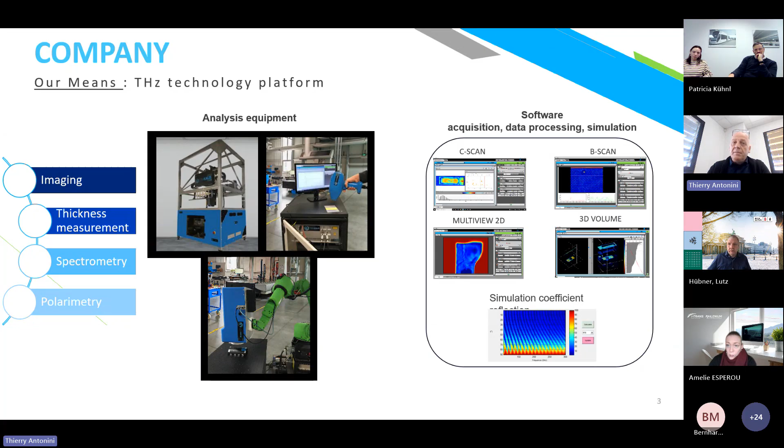Here you can see on the slide such a bench or technical means that we can provide for testing material in our premises, but we can also do some tests directly on customer sites. Obviously, more than hardware, we complete them with software for data acquisition, processing, and even some simulation, mainly today for imaging, 2D, 3D, and also thickness measurement. Today we are more concentrated on lab applications or production line applications.

Here you can see some developments. Mainly, we completed our hardware with some mechanical scans, such as a robot or some translation stage, for instance, automatic inspection on conveyor. And the last machine we created was dedicated to cylindrical parts. It is a rotary scanner for 360 inspection of cylindrical parts.

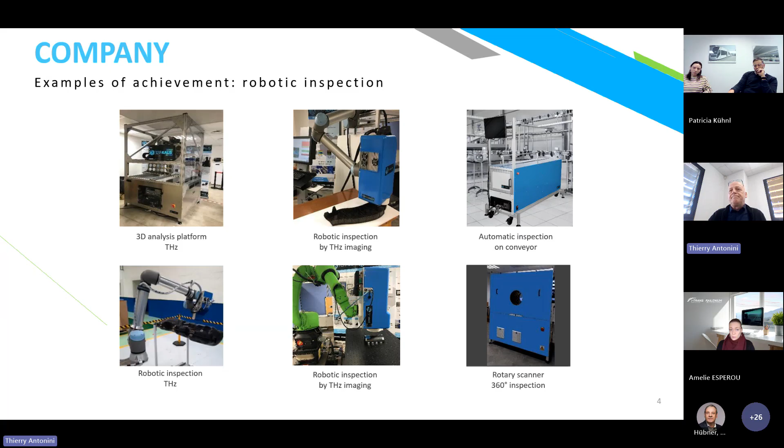Sorry. As I said, we have 3 ranges of offer: laboratory equipment, production equipment, and we are starting now to develop some devices for maintenance activity on operating sites, because as you will see, the technology which allows us to inspect the inner defects of a material could be used also for maintenance activity.

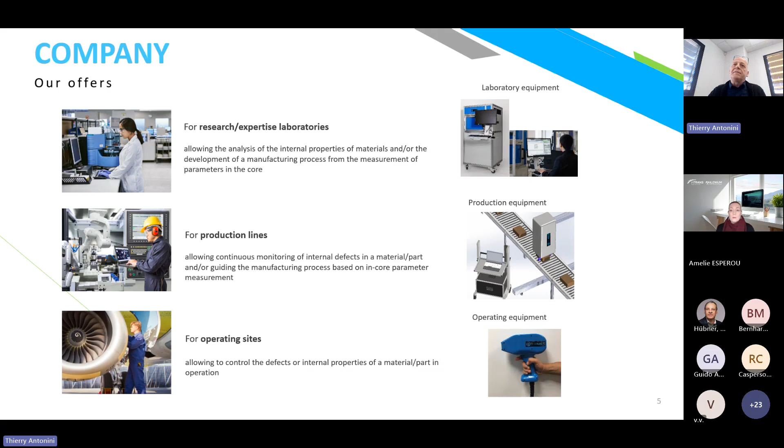About technology, first I need to locate the waves that we use. They belong to the electromagnetic spectrum and are located precisely between microwaves and infrared. It was the last domain which was not used for NDT, non-destructive testing applications, mainly because of physical reasons. In fact, it started 20 years ago with the first laboratory devices, and only recently for industrial applications. It started 5 years ago with the appearance of the first systems for production lines. The problem was to get more mature and more robust systems for industrial environments.

And this technology is interesting for three main reasons. It's non-ionizing waves in comparison to X-ray, so no danger for the operator. It can penetrate non-conductive materials, mainly polymer, elastomer, ceramic, and composites based on such materials. And it can also provide some interesting signatures for understanding how materials transform, for instance, for crystallization, polymerization processes, and also aging processes, which could be used for maintenance activity.

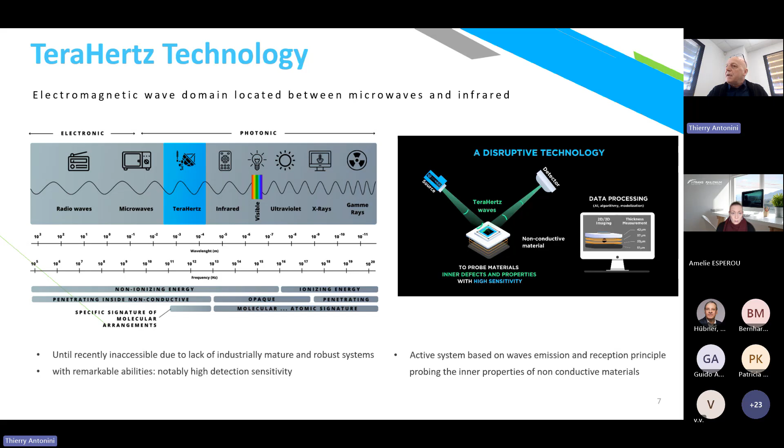The main principle of this technology is based on active systems. That means you have a source which emits waves. The wave penetrates the material and then goes to a detector. Based on this, we can probe materials, especially inner defects and inner properties, in a non-destructive and non-contact way. And after processing the data, we can give interesting information to the customer for detecting defects, locating defects, giving the size of defects, and also giving some measurement of a layer.

The main principle of this wave in terms of wave-matter interaction is that all materials are classified in this graph. Some materials are quite absorbent, so of course we won't be able to penetrate them. For instance, metal is quite absorbent, and at the same time metal is also quite reflective. That is why we cannot penetrate metal as a conductive material. On the contrary, polymer, ceramic, composite, foam, we can penetrate easily.

And one more thing is important to know about such a wave: water and polar liquids are quite absorbent. So if there is too much water inside the material, we won't be able to penetrate. On the contrary, a small quantity of water inside material could be easily detected by our waves.

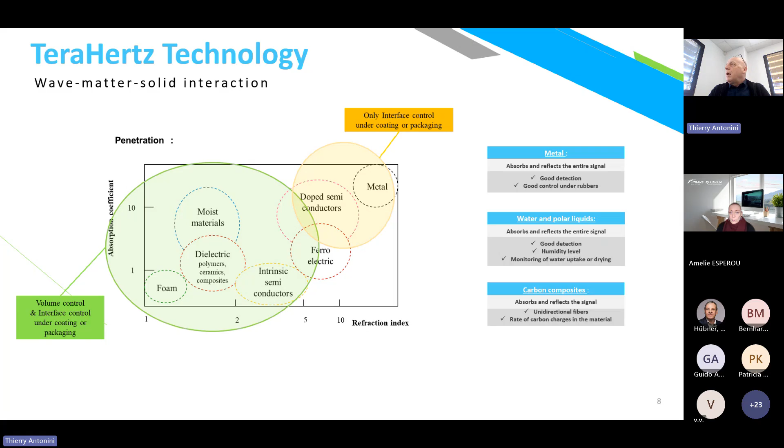Carbon composites also, you can imagine, are quite conductive. So the only application we can address for such a material is when the carbon composite is unidirectional tape, we can penetrate, but as soon as the directions of the carbon are mixed, it's not possible for our wave to penetrate. It's not the case, obviously, for glass fiber, which is a non-conductive material. So glass fiber and aramid fiber could be easily penetrated by our waves.

Here is a summary of the performance and the advantages of the technology. Contactless, penetrating, non-destructive, not harmful, portable, fast, easy to integrate. And for imaging, we can address defects less than 1 millimeter and penetrate a few centimeters of such non-conductive materials at high speed. It could be 2D or 3D imaging.

And for thickness measurement, we can measure from 5 microns, so very small layers, to larger layers up to 10 centimeters, with quite good accuracy, plus or minus 2 microns for very small thickness, and 10% of the measurement for higher thickness. Speed, more than 100 points of measurement per second, quite adapted to industrial production speed. And a very important point is the possibility to discriminate layers in a stack of multi-material coating, for instance.

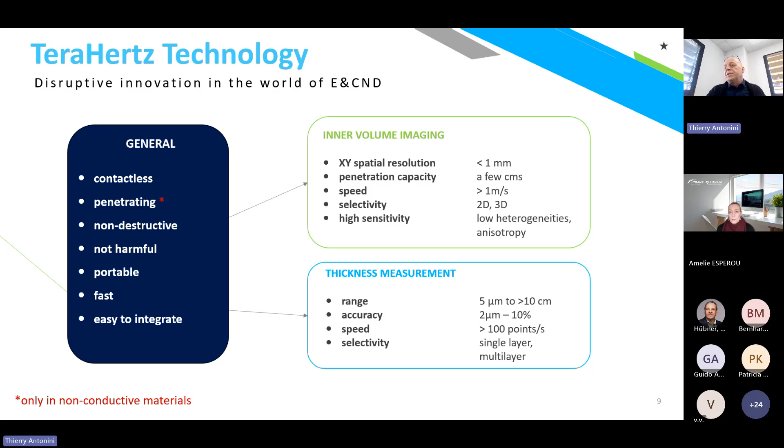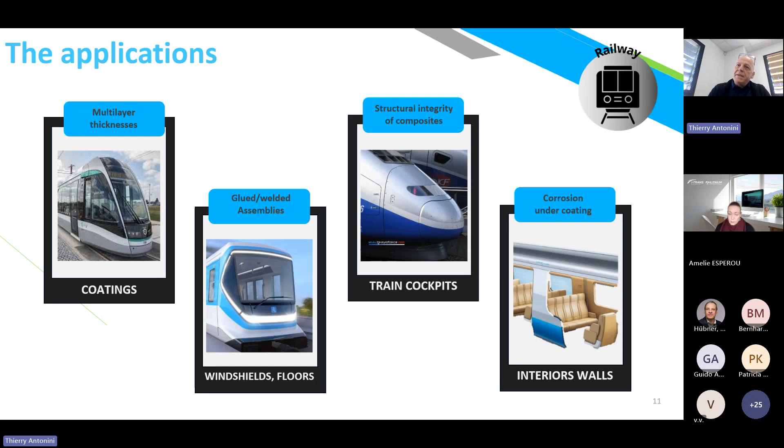And last, what we are asked today by some customers is to be able to detect corrosion under coating or under interior walls that you can have inside trains, in order to avoid removing the panel for detecting corrosion. It could save a lot of time, and it gives you the information that the metal which is behind the walls is already corroded. I go now in detail into the 4 applications.

So inspection of coating based on time of flight measurement. Each interface could give an echo back to our system. And if we can measure the time between 2 echoes, you can have access to the thickness of the layer. The main advantage is that it's quite fast, contactless again and couplant free.

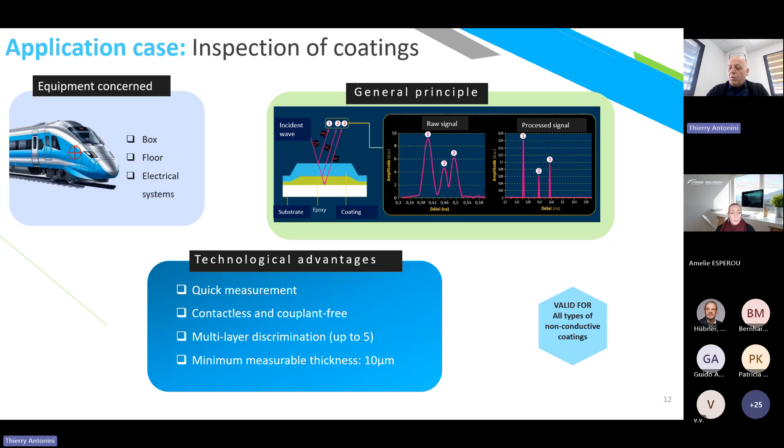Multi-layer discrimination, which is not the case of many NDT techniques, and minimum measurable down to 10 microns, and it can work whatever the substrate. It could be a metal or a composite substrate. This is the main principle, how it will be displayed on our software. We can adapt our measurement head on some robotic system,

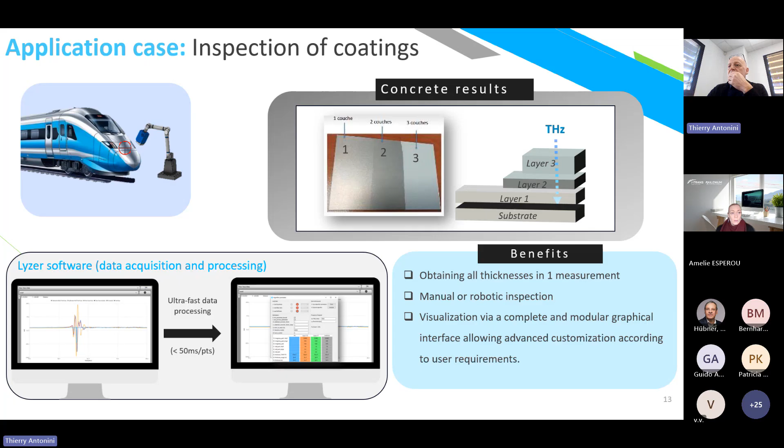and maybe just for your visualization, here you have the case of an application. It was for the automotive sector, but it could be used. So as you see, the system first is doing some calibration by itself. And after a few quick steps of calibration, the system can do by itself a series of measurement points, as you will see now.

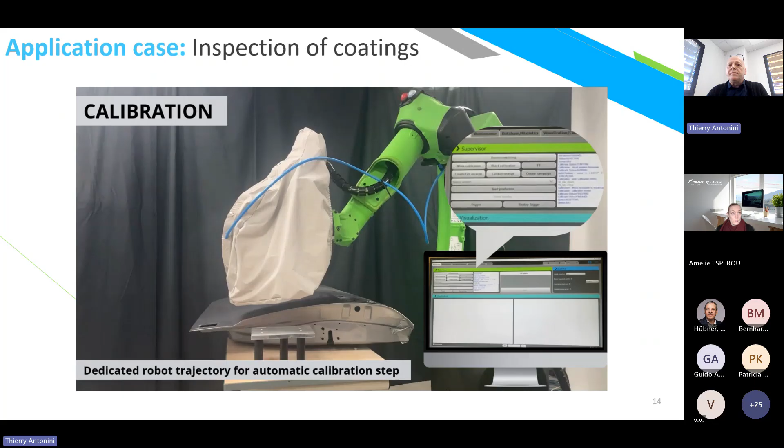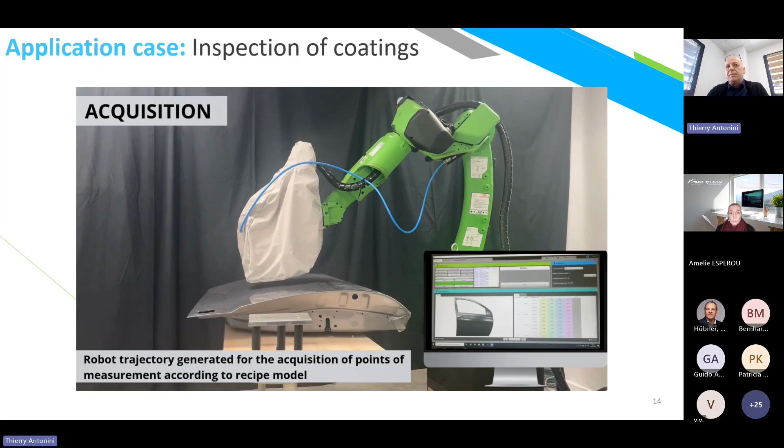So the system will start to move and to follow the surface of the part in order to do measurements on the fly, I mean in real time, based on trajectories that could be defined and series of points which have to be located before, in order to ease the measurements which are afterwards consolidated.

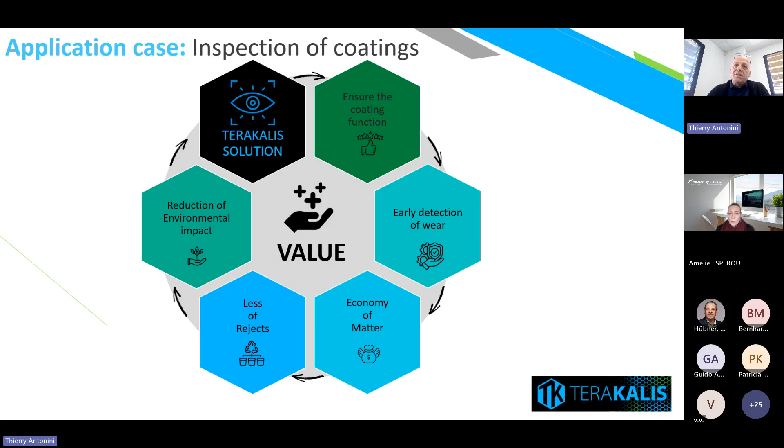A lot of value behind such an application. It could be, of course, quality improvement, but also productivity improvement by reducing materials or by early detection, or by limiting the rejected parts due to bad quality, by anticipating defects and locating defects, gaining more knowledge on the process itself, and reducing also some environmental impact.

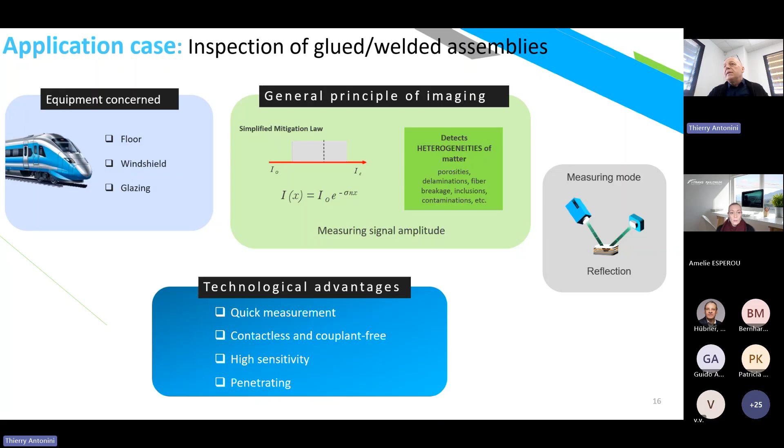Second is about assembly, and windshield is the main target, or even floors could be interesting to control. So it's based on reflection mode. It's not thickness measurement, but imaging based on an imaging sensor. It can be done as a quick measurement, contactless and couplant free again, and penetrating all materials.

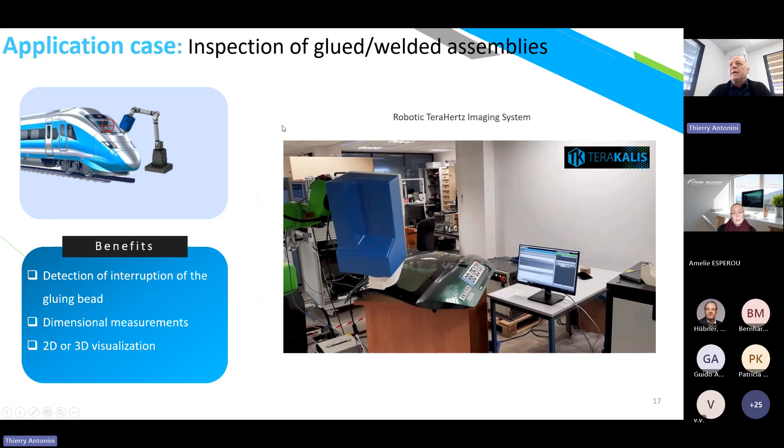Here you have another example, mainly for the automotive market. You can see the speed. The control is to detect the glue bead between glass and plastic tailgate, and we can easily detect the size of the glue bead defect inside through this technique, again non-destructive and contactless. Here you can see the result at the lower part of the slide,

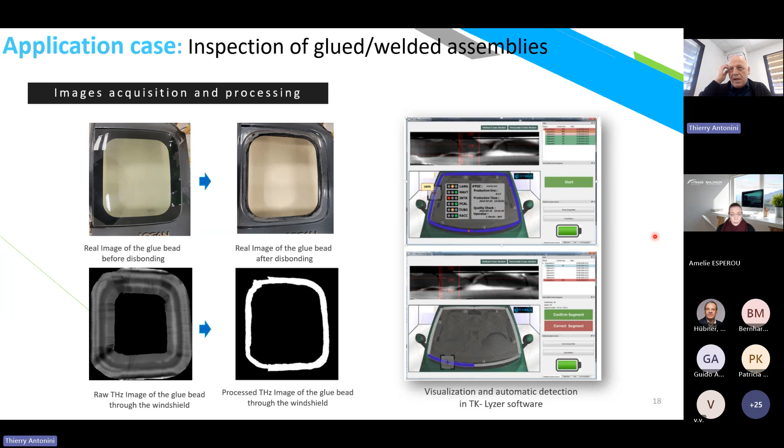how the bead is represented. Sorry, I don't have the laser. The bead is represented in white here, and after extraction of the information, you have the size of the bead. If there is some interruption, you can detect it, and the final display on the software lets an operator decide and validate non-conformity or not.

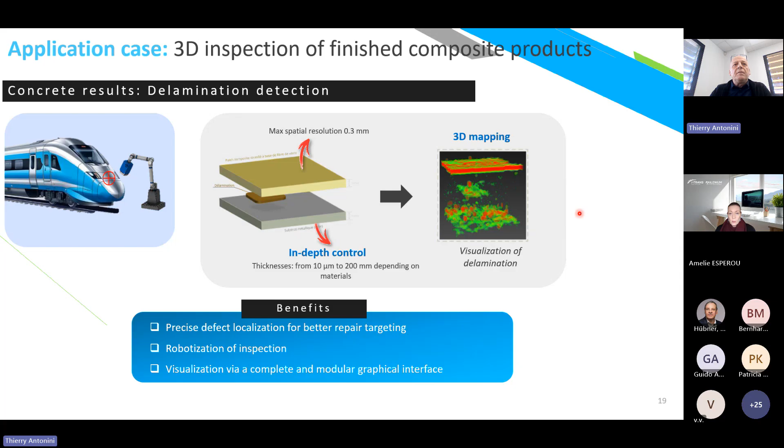Concerning a cockpit, for instance, you see a THz image where we can detect, for instance, in this composite stack, a delamination that could be detected on a 3D mapping, could be located, and the size of the defect could also be provided by the system with our penetrating waves.

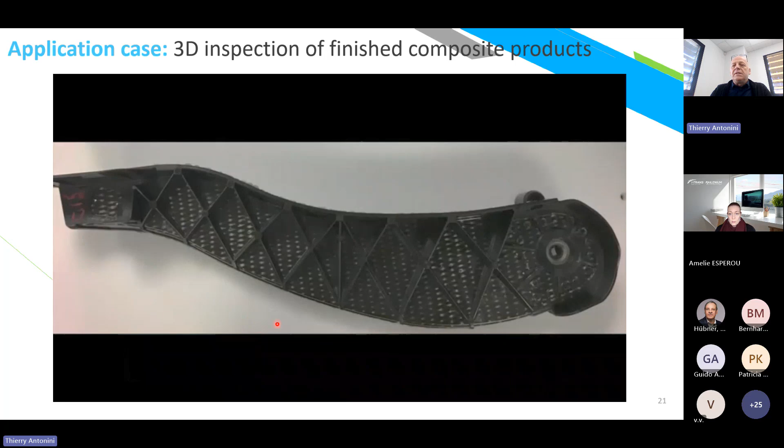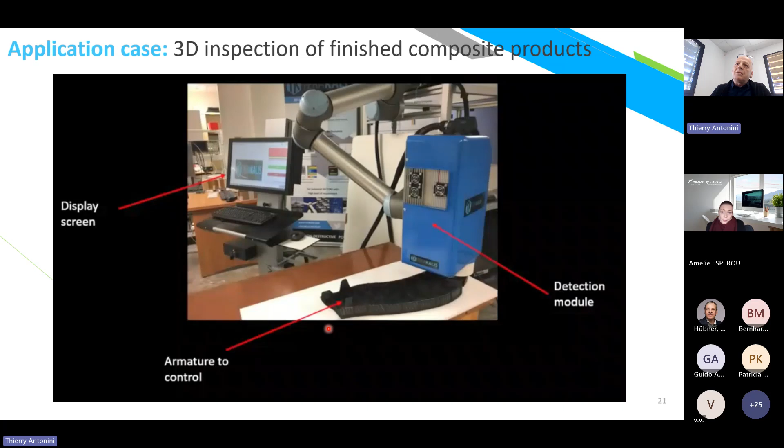Sorry. Well, okay, I will go through due to the time, but just for you to have an idea, this is a composite part that we can inspect. You see how it will be assembled, how the system could work, and the scan will start little by little, and in real time you can see here some potential defects inside such materials.

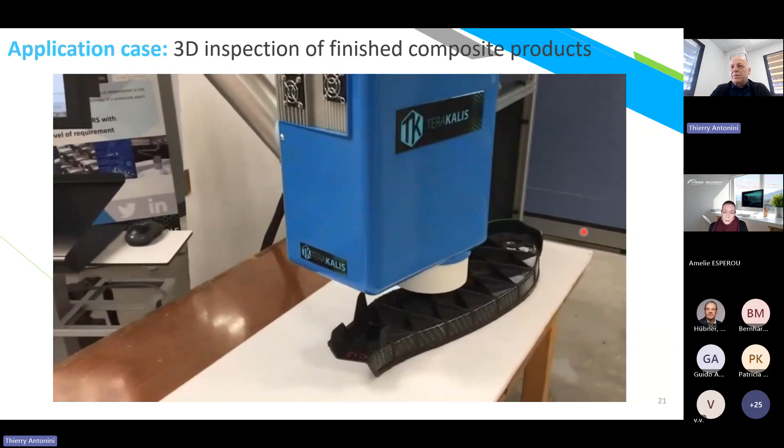And last but not least, corrosion under coating or under materials. Again, the wave can penetrate the wall, plastic polymer walls, and can see behind the wall.

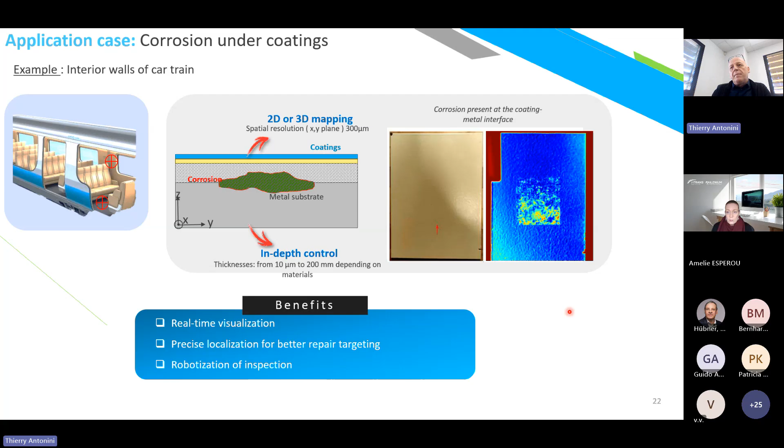So as a conclusion, this new NDT technology based on THz waves presents unique capability for advanced control of non-conductive materials, obviously for thickness measurements, especially for multi-layer coatings, or to image defects inside the materials, different types of defects: delamination, air gaps, bonding issues, and also to detect corrosion under coating.

And sometimes, step by step, our customers use the system in their process in order to correct some parameters of their process in real time. That's my conclusion.

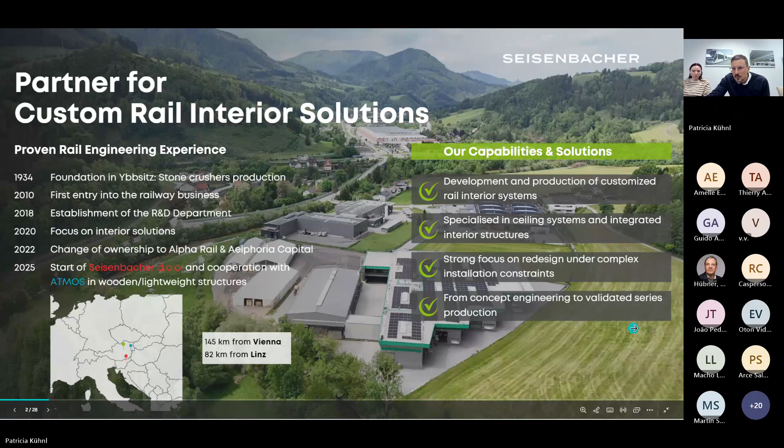I already explained a little why the railway industry relies on Seisenbacher. We have a clear focus on safety. That means we try to think as a passenger, not only as a supplier. We try to visualize what the passenger would feel, and what safety requirements are necessary for passengers to feel comfortable and safe on the train. We also try to think about solutions that make the journey more an experience than just traveling from point A to point B.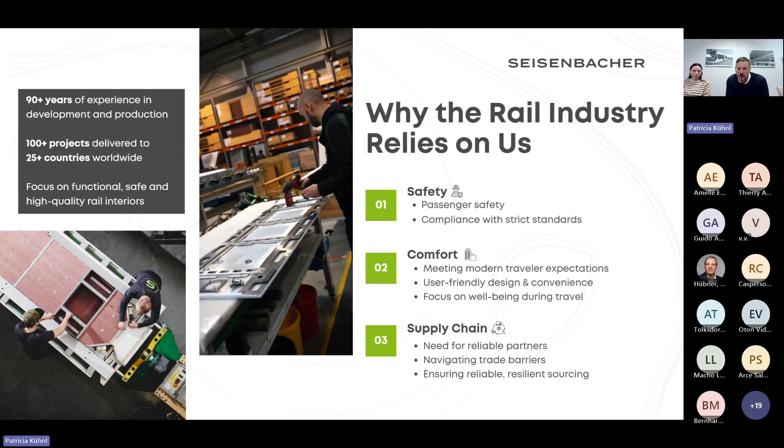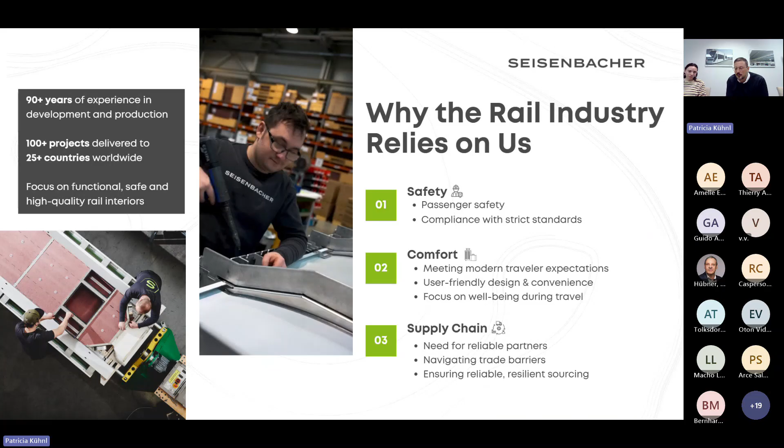As a third big part of our work, we see supply chain management. In past years we have built up quite a significant base of reliable partners. We always look for solutions to navigate trade barriers, like shipping to the US, while ensuring reliable and resilient sourcing. The big challenge is to combine all these aspects into a finished product, into rail interiors. Our answer is innovative products combined with our deep understanding of manufacturing. This is the strength we put on the table.

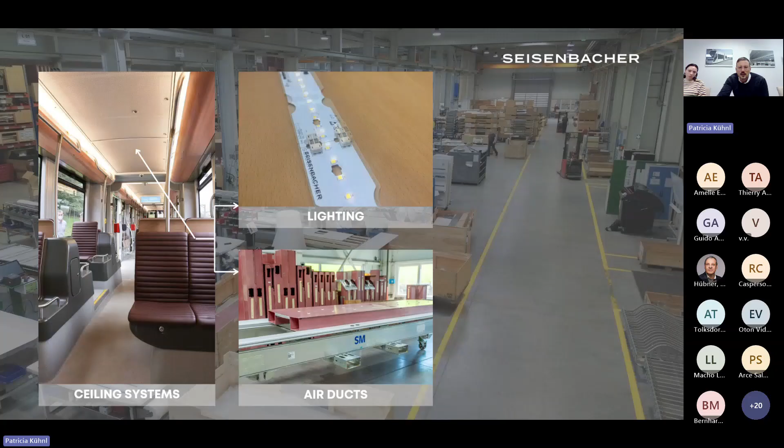So before we jump into engineering details, let me show you our key rail interior solutions. As mentioned before, the majority of our turnover is coming from the ceiling panels or ceiling interiors, where we integrate lighting, but also air ducts to give one complete ceiling system to the customer. And besides ceilings, a strong product is also luggage racks and luggage shelves, but also partition walls and claddings. The main material we are using for our products is metal, aluminum.

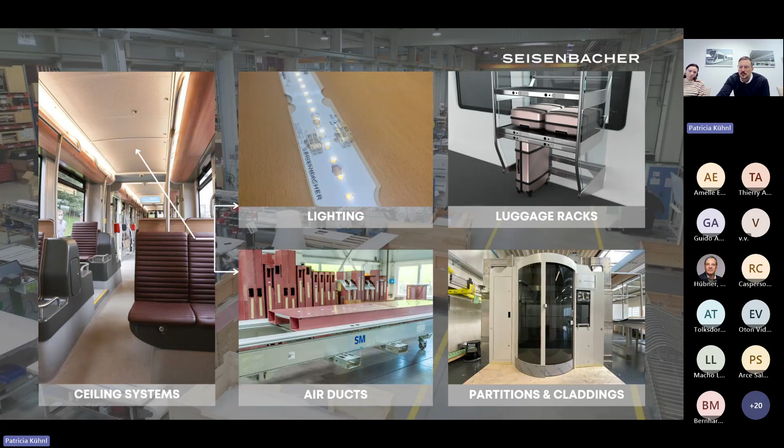Our technical competences or core competences reach from mechanical engineering to electrical engineering, and all the necessary validation steps that are needed, combined with a testing laboratory where we can check the simulations and confirm our design is working for the considered solution.

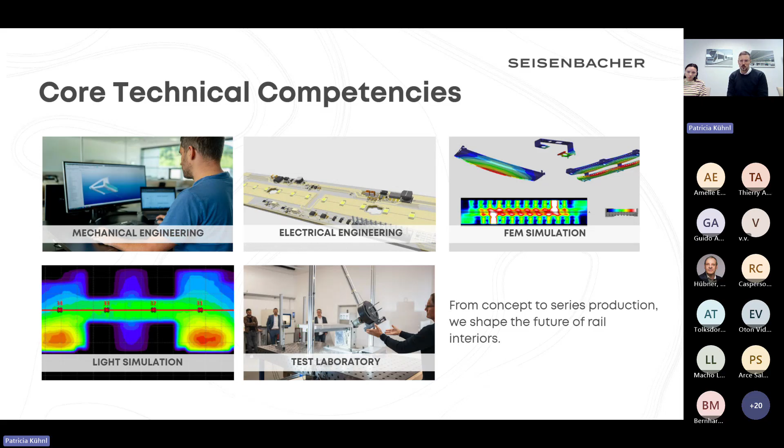As mentioned, I want to show you one very challenging development product where we think that we have a good example of combining aesthetics with safety functions. There is a safety standard in the US asking the table not to heavily injure a person when impacting through a crash scenario in such a table system. Here you can see the product.

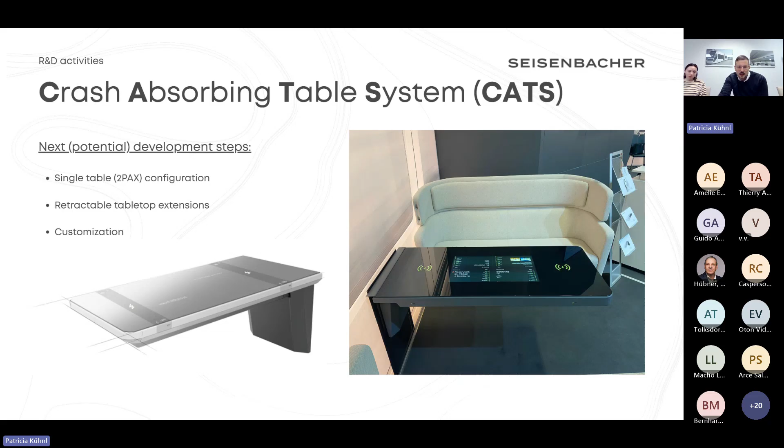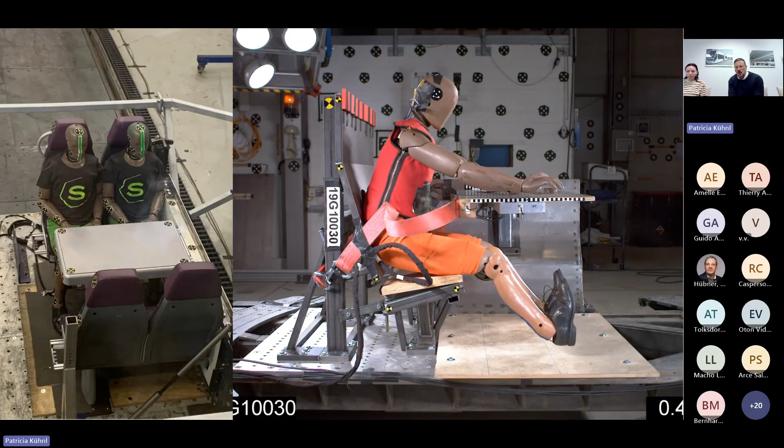What was new for Seisenbacher was the intensive testing. So not only the engineering and finding a potential solution to realize this requirement coming from this standard was interesting, but also the validation, where we took over 50 days in a crash testing laboratory. And we learned a lot about using different dummies, what are the sensors, how are they located in such dummies. And doing that brought us also on the screen of the center that is responsible for writing this standard, and a big part of the updated revision of this standard was also compiled together with Seisenbacher.

So jumping into the engineering, you may ask, why do standard rail solutions often not work? Yeah, there are many aspects. Mainly, there are limitations coming from materials and the way these materials can be produced or machined or transferred into an actual product. We have a heavy impact coming from visual aspects. That means almost every operator is using industrial designers, design houses who have very, very nice and good ideas. And the challenge is to really realize and bring to life these ideas.

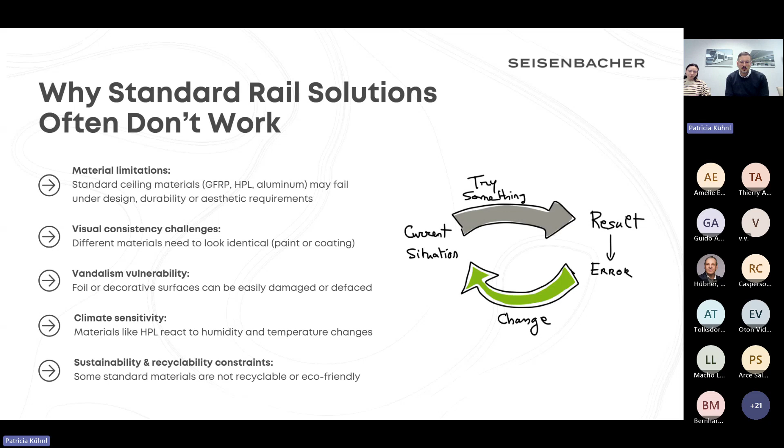And then, of course, we also have the passenger aspect in terms of vandalism. That means that the parts need to be very durable. Besides vandalism, everybody knows the life cycle of a rail system can take up to 30 years. Most of the time, interior components are exchanged mid-life, but not for the purpose of exchanging damaged ceilings or damaged parts, but to make the train or the railway car look more modern again. And then we have, of course, aspects on climate topics, and now more and more we are facing sustainability and recyclability constraints.

Some examples, we have here a project called VDV. It's a tram train produced by Stadler for several different cities all over Austria and Germany. And the goal was to have this seamless appearance across the interior, using suitable materials. In the initial design, we were confronted with using GRP parts. When combining sheet metal with GRP, you always have discussions about how the final product will look. How is the powder coating of the aluminium looking in comparison to a wet painted GRP part? And usually this can be handled through an expensive quality control aspect, comparing to the paint samples.

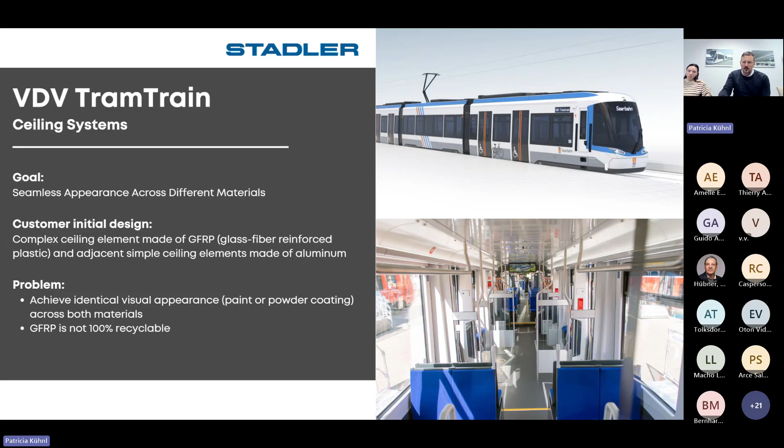But we wanted to do it differently. We found a technology, here on the right you can see the part, how we can do this part made of aluminium. In this case, it's a deep drawn aluminium component. This is ensuring a uniform powder coating surface for both the non-complex and more complex elements, so the more 3D parts. And another advantage this part is bringing is maintaining the structural integrity. It is relatively less influenced by environmental conditions, and the maintenance is reduced because the durability is enhanced.

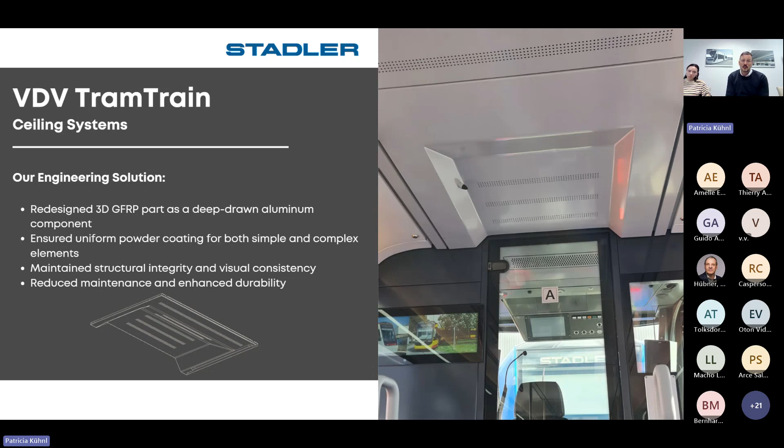Another very interesting project that we are doing together with CAF in Spain for NS. This is the double deck train that is now being ramped up for production. The initial design was a ceiling made out of HPL to make it look like wood.

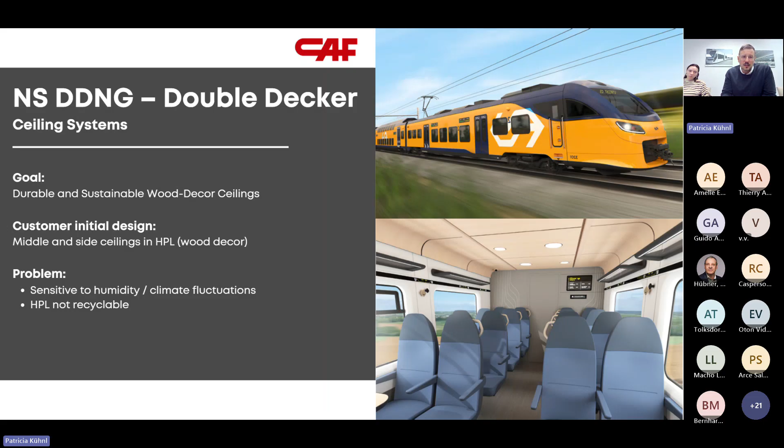I personally think this design is very, very nice. It's very comfortable for passengers, but there's a big topic with HPL. It's very sensitive to humidity and climate fluctuations, and HPL is not recyclable.

So we tried to find a way to use our beloved aluminium, and we found a process that helps us to transfer this wooden optic into a powder-coated surface. It's called a sublimation process. And the result is that you have, let's say, a standard ceiling looking like it's made of HPL, giving the wooden optic, and in the end it's recyclable, and it has a high resistance to humidity and temperature.

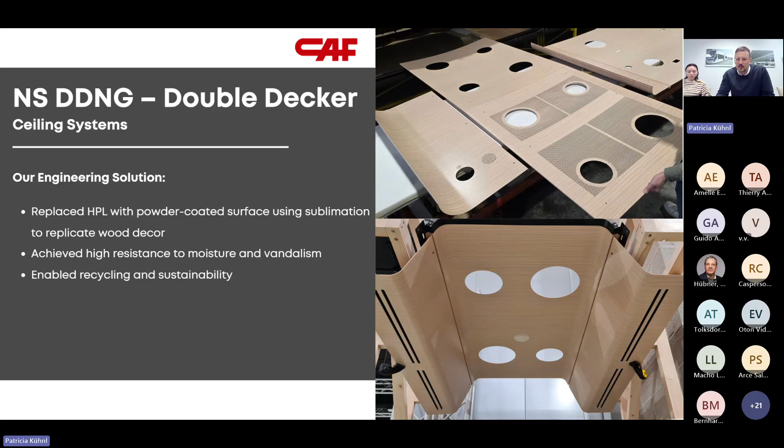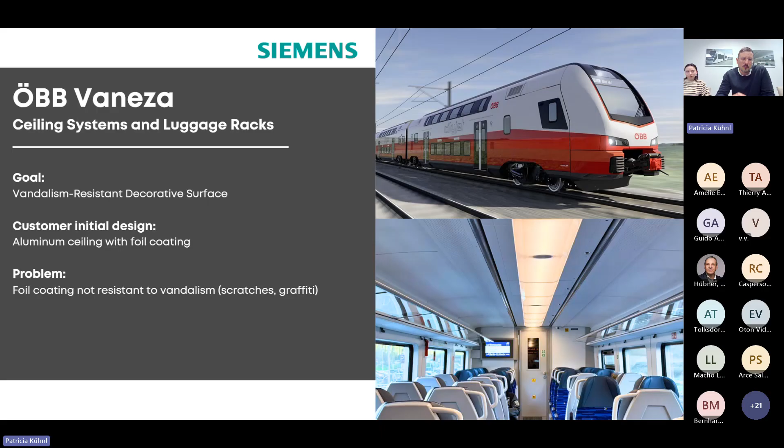Or another project that we are doing with Siemens: the customer, ÖBB, wanted to have a mountain pattern applied to the side ceiling. So we were trying to find the right process for doing that. Our customer was not convinced that a foil will do the job. Neither were we. A foil is usually something that is subject to vandalism. You have people scratching the foil or ripping it off. So we found a company who is doing a silk print for us to achieve this mountain pattern look.

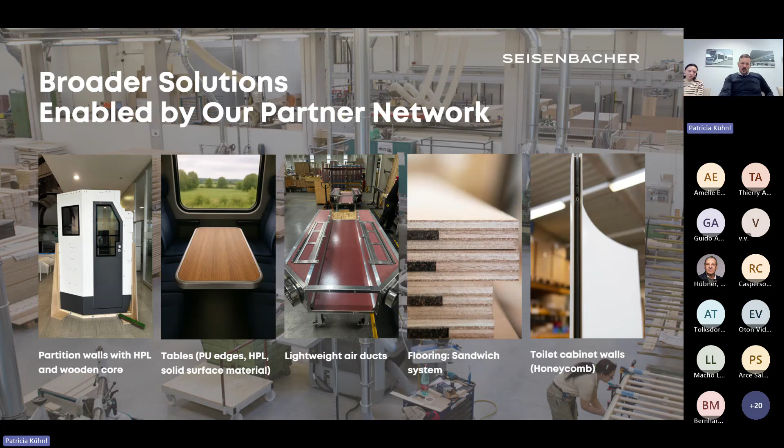I mentioned before that we are enlarging our portfolio. We are doing this in the direction of wood. Why wood? I think wood is a very interesting material, and it also offers the possibility to produce lightweight structures. So we teamed up with a company in Austria, and together with this company, we are working on a project also for Stadler, where we are delivering a wooden cab partition wall.

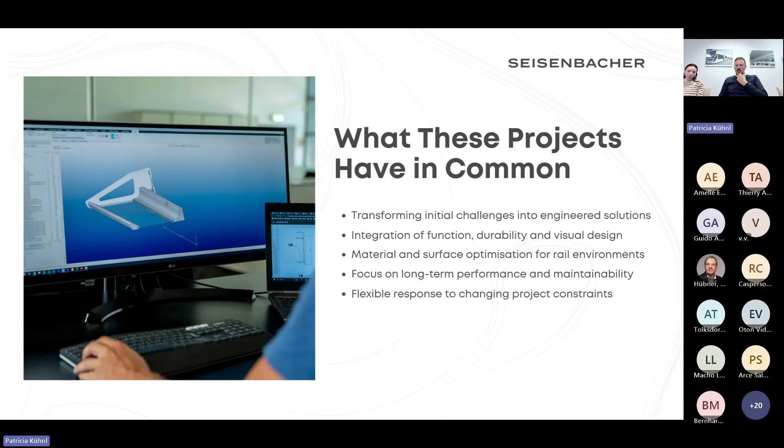So what do these projects have in common? We have the challenge to transform the initial solution into an industrialized solution. We have to integrate functionality, durability, and the visual design. The material and the surface need to be optimized for the railway environment. And the focus needs to be on long-time performance and very low maintenance. Of course, we also have to offer a flexible response to changing project constraints.

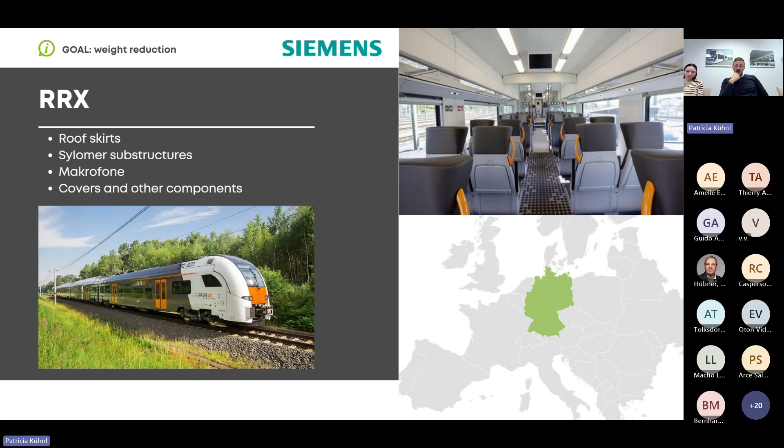Some other projects that I'm briefly mentioning: roof skirts for the RRX project for Siemens with the target to reduce the weight. We ended up using aluminum extrusion where we reduced the thickness and met the weight reduction goal. Then a partition wall for San Francisco Muni, also together with Siemens, where we had to do the complete engineering or re-engineering from the initial design. It's using polycarbonate panels for the door.

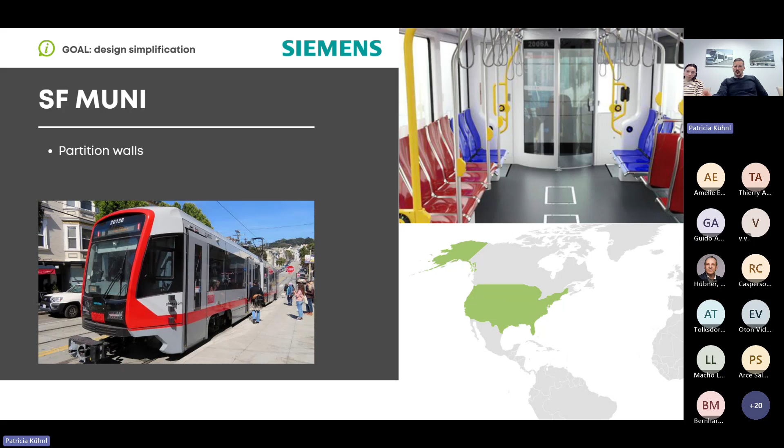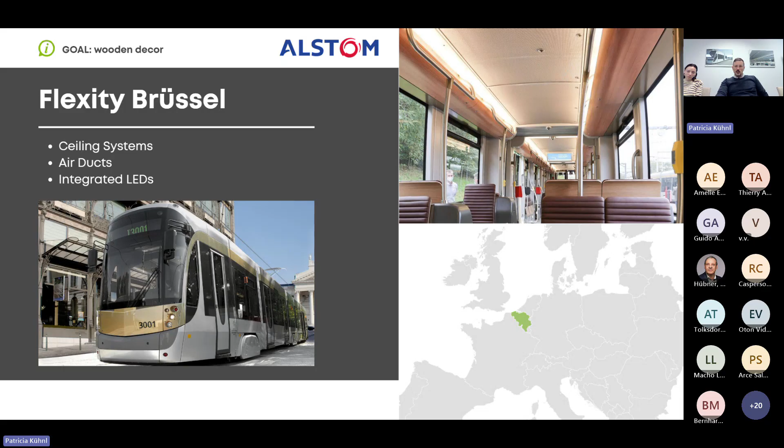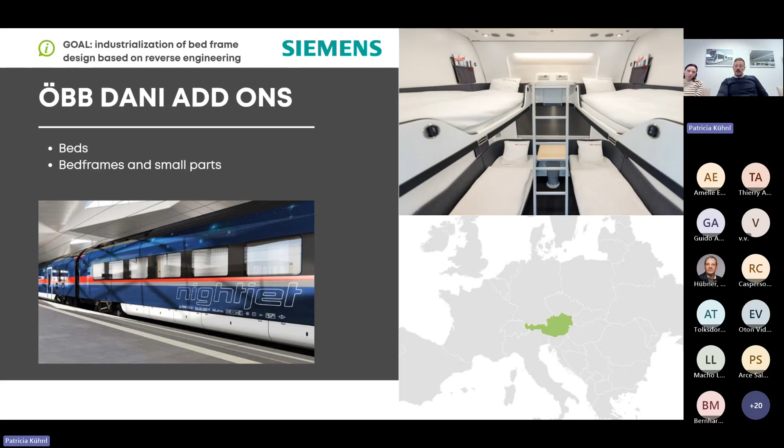Another wooden decor project is the tram for Brussels, where the side ceilings are done in the same way we are doing the NS project. The beds for the sleeping coaches for ÖBB and Siemens, where we had to do a complete redesign of the bed frame to match the design concept provided by the designer. And a seating system that was done as a co-development together with Alstom, where the seat shell is done in aluminum extrusion that is rolled, and this aluminum extrusion offers the possibility to easily exchange the seating surface.

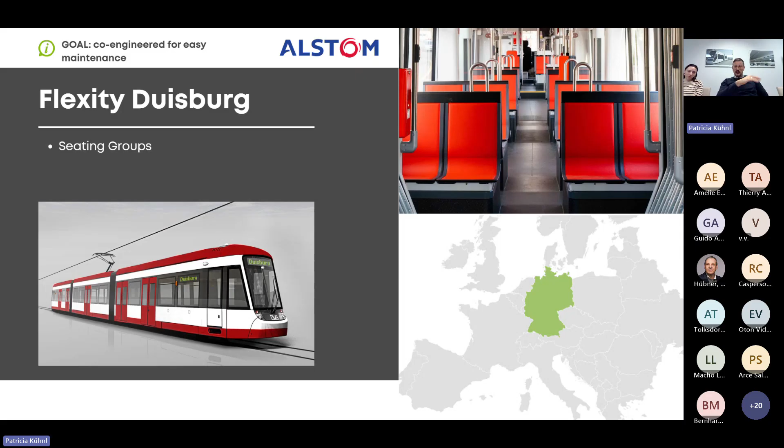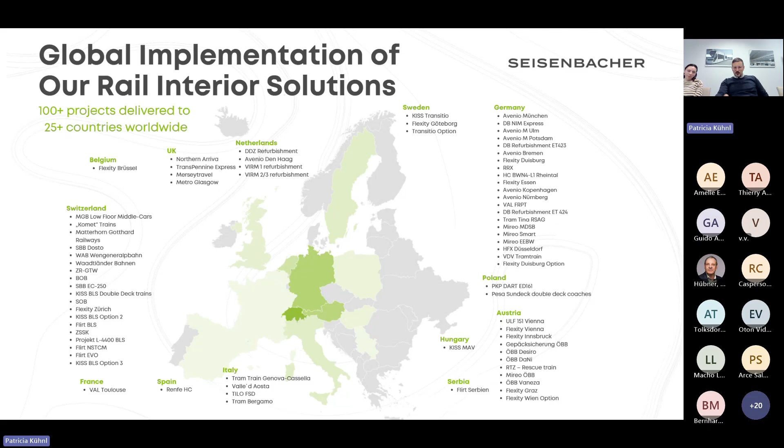Here is a rough overview of the projects we have done so far. We are proud that we have been part of more than 100 projects. We ship to 25-plus countries worldwide, but we also have a clear focus on the DACH region.

So our key takeaways: challenges are addressed through tailored solutions. Functionality, design, durability, and sustainability are considered part of the solution and always need to be thought of. A flexible approach and adaptation to project-specific requirements always need to be given. And we collaborate with OEMs, operators, and partners to support their requirements or to help them implement interior components.

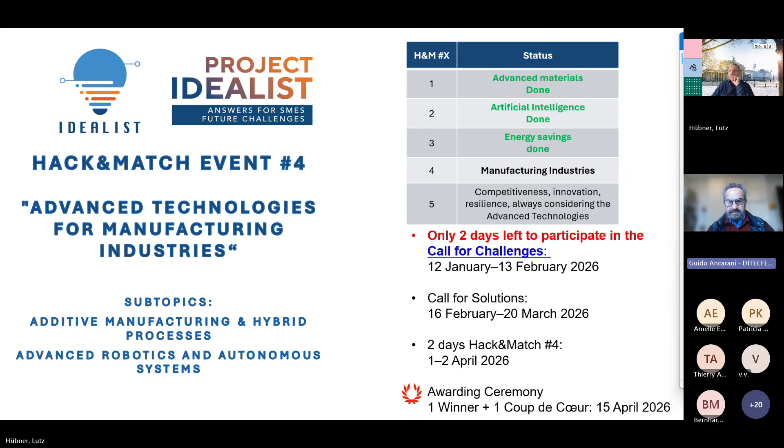The second activity which is done in this Idealist project is the LEX, Learning Expedition. The upcoming one is number 5. It will occur mid June in Nantes. It will be focused on additive manufacturing and hybrid processes. For more details, you have the QR code and the elements that are in the chat. Just to inform the SMEs that a voucher of 500 euros is available in order to partially cover the travel and accommodation cost. Again, it's a way to see what is happening in Brittany. We will visit Airbus and other big companies. It's a way to discuss amongst the companies participating in these LEXs. I've been to all of them.

It's really interesting. It's not a brand new way, but it's a different way to discuss, to see practical activities, visit companies like Airbus, which are not open to everybody. Why Airbus with the railway? Because we have to learn in terms of multimodality and exchange of experience in ecosystems which are similar. There are a lot of things to learn. So SMEs, but also big companies are invited. The voucher is only for SMEs. Next slide. And I give you back the floor, Lutz.